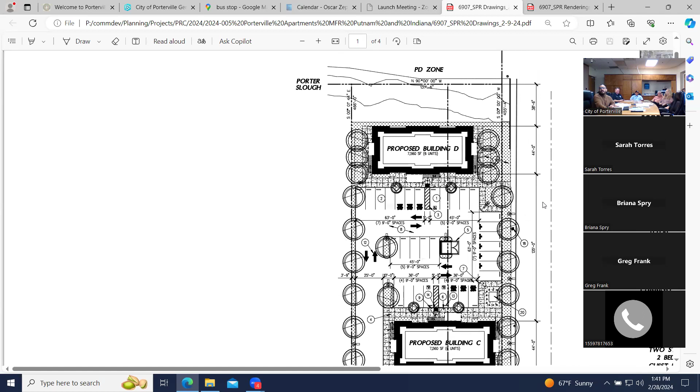And one question we had for the applicant: would these units propose any affordable housing, or would it be just market rate? Currently, we're looking at market rate, but we're open to affordable housing as well.

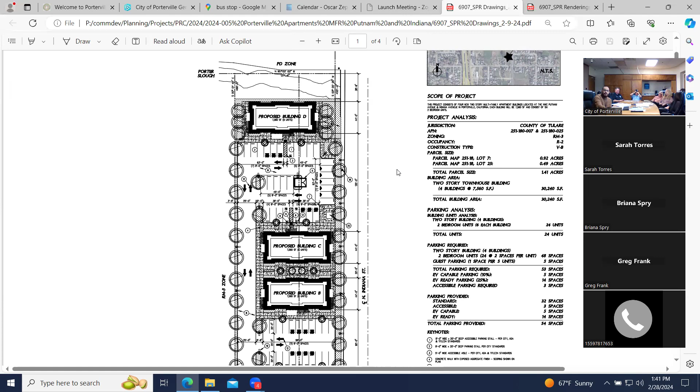There are some incentives and concessions. If you do go that route, you can also get bonus densities as part of your project to exceed the maximum allowable, for example. We will provide that information in the PRC comments, if that is something you would like to take a look at. That'd be great. Thank you.

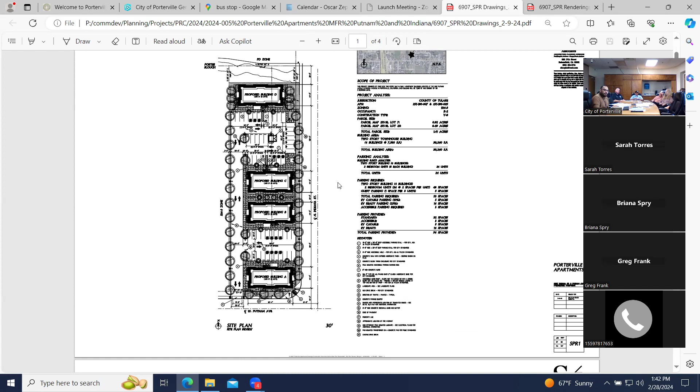But other than that, that's pretty much our comments from planning. Are there any questions at this time for planning, Greg?

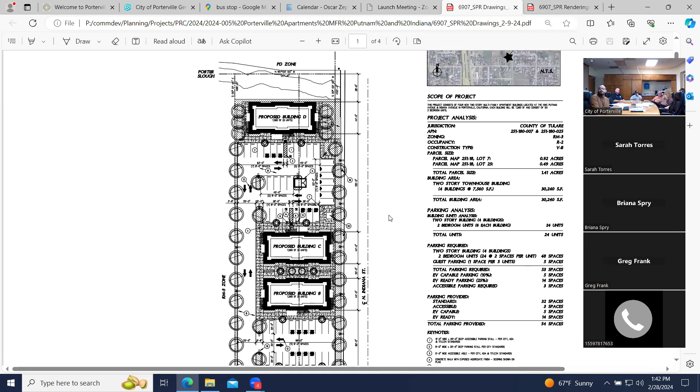No, the only item I was going to bring up was the discrepancy between our application stating 32 units versus the 24. I'm glad that you caught that. Thank you. We've been going back and forth with the developer to increase density and actually had looked at converting one of the 2-bedroom units in each building into 2 studio units, but after doing some more market research, we reverted back to all 2-bedroom units.

Okay, I do want to share the elevations here of the project. Something that I did want to mention also that the project does meet the minimum for architecture articulation, making sure that the units have a roof or recessed entrance.

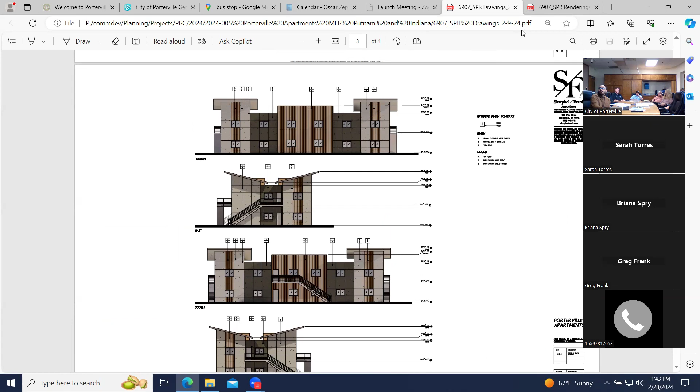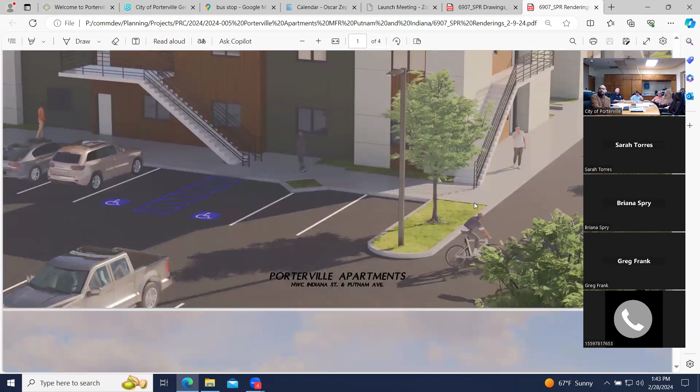Just a comment I also wanted to add. Okay, we'll move it along with fire with Clayton.

For this project, the project shall comply with the latest applicable codes. Fire hydrants shall be placed based on distance, no greater spacing than 300 feet for multifamily residential applications. Where 2 or more hydrants and multiple fire sprinkler service connections are required for a project, the fire hydrants and service lines shall be on a looped system with proper backflow prevention.

Depending on the location of existing hydrants and the required fire flow, additional hydrants may be required. All hydrant locations shall be approved by the fire department. Fire hydrants located across a public street shall not be utilized for calculations or considered as available to meet the fire flow and/or FDC connection requirements for this project.

No structure shall be greater than 400 feet from a fire hydrant. All hydrants must be in place and accepted by the fire department prior to any combustibles being brought onto the site. The project is to meet the minimum fire flow requirements per the table in Appendix B of the most recently adopted edition of the California Fire Code, which is the 2022 Fire Code.

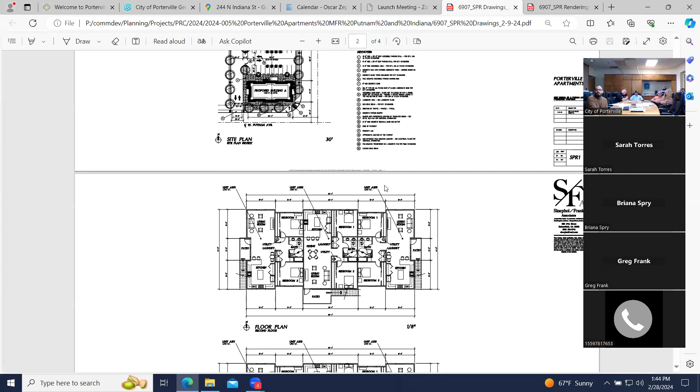Fire sprinkler plans and calculations required. Underground plans shall be submitted with above ground plans. Fire alarm monitoring plans are required. FDCs are required to be placed within 50 feet of a fire hydrant in an approved location. And where conditions permit, the FDC is to be located no closer than 40 feet from the building.

2 entry and exit points are preferred. Based on the size of this project right now, this is not a requirement, but it is preferential if the configuration could be changed to allow for a second point of entry access, primarily on the Indiana side there. And if so, if there is a secondary access, it has to comply with the California Fire Code.

We need to maintain a minimum of 20-foot roadways for the fire department access. Fire extinguishers shall be placed to comply with the currently adopted edition of the California Fire Code, which requires no further than 75-foot travel distance.

Address numbers shall be posted on the buildings and shall be visible from the street. Installed numbers shall contrast their background. And based on what I'm seeing now, it's not showing it. However, if through your discussions and as you move forward, you decide to put gates on this, we will require Knox gate access for any gates that are installed.

And that's it for fire. Do you have any questions? No, those are all great comments. Thank you.

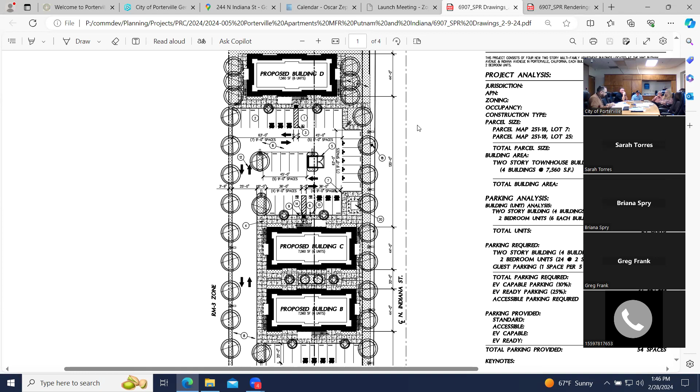Thank you, Clayton. Next with James with building. For the building department, most comments would be during the plan review process. Keep in mind that these will have to be designed per 11A of the CBC for accessibility. And that's all the comments that I would have at this time.

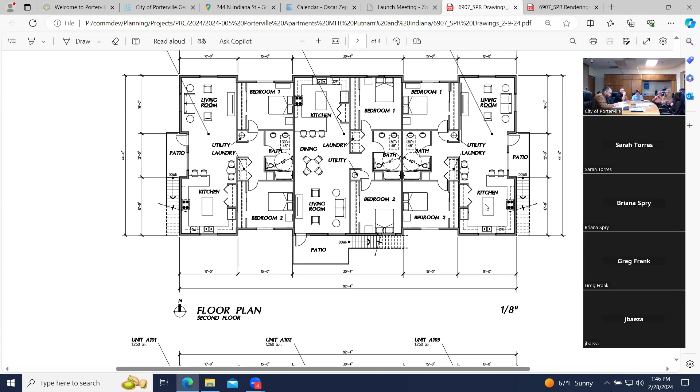Thank you, James. Next with Javier with engineering. All right, thanks, Oscar. For engineering, let's see. Utilities exist there. There's sewer and water around the Indiana and Putnam, so it'd just be tying in to that as you need it.

One main comment will be that because of the scope of the development and our requirements of the general plan, the existing sidewalks that are there would be removed in order to provide a landscape parkway and an offset sidewalk. And so that applies to both frontages. May require improvements to that ramp if it doesn't meet accessibility requirements. And then there'd be an addition of a few more street lights.

As far as a drainage pattern, if you get it to the street, it'll flow west, but there is a minimum required amount of runoff to be held on site per the state's MS4 requirements. So that could be a mix of either a depressed landscaped area, pervious concrete, underground storage, things like that. So those are the main comments from engineering.

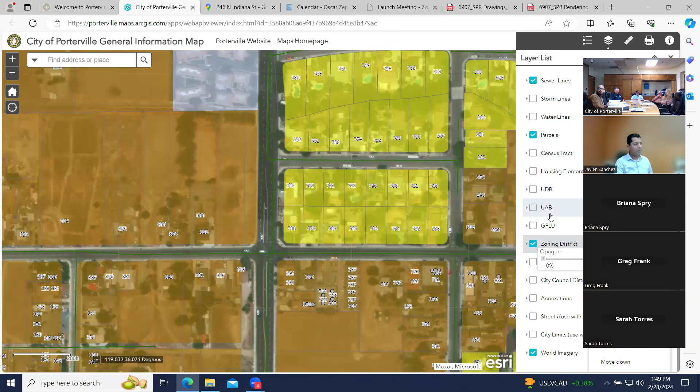It just depends on the designation of the streets. I believe Indiana's an arterial. That one requires 7.5 feet of landscaping behind the curb, and then an 8-foot sidewalk behind it. And then on Putnam, which is a local street, that's a 4.5-foot landscape parkway behind the curb and a 5-foot sidewalk.

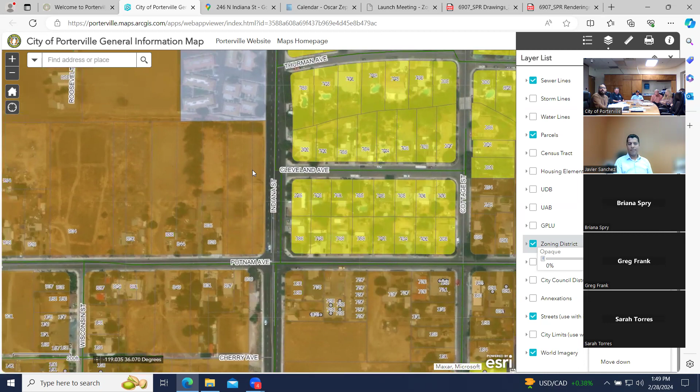Thank you. One quick question, Javier, if they do decide to provide a second access point, since it's not single family, it will be multifamily, would that be something we could allow on an arterial? Yes, yes, and it'd be nice if that could line up with Cleveland Avenue. But if it's offset from that, then we can take a look. Good, thank you.

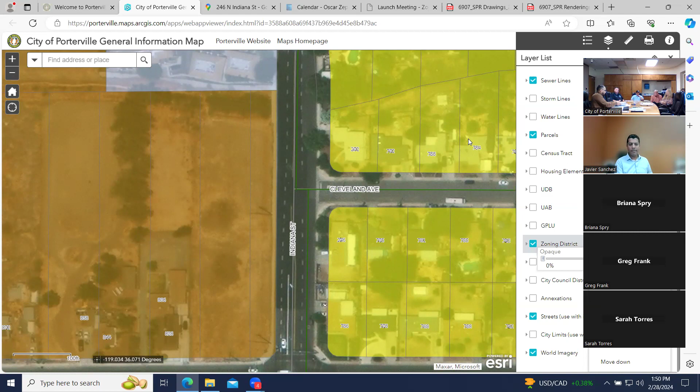Next with Briana. Hi, just to clarify, are you going with the 24 units or the 32 units? The 24 units. Okay.

So this will require 3 triple bin enclosures due to state mandates. Looking at the plans, unless I'm not seeing it correctly, I'm only seeing 1 enclosure there. No, you're correct, we had shown just 1, but we'll make the adjustments to add 3.

Yeah, they'll need 3 bin enclosures, and preferably direct access. Because the way it's set up right now, I'm 99.99% sure that the drivers would not be able to make that loop at the top to service any bins if they were in that area. But having that second access point onto Indiana would be incredibly helpful.

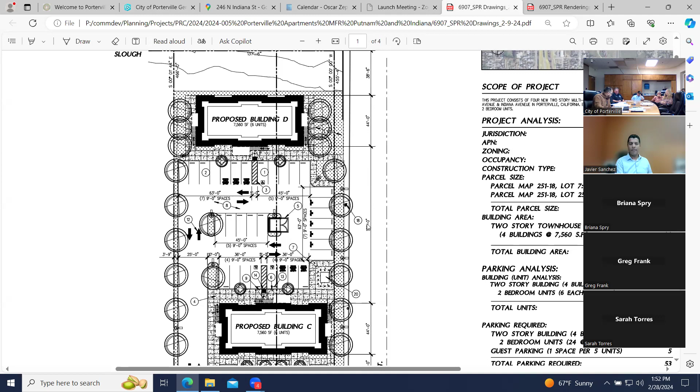Yeah, I agree, I could see the need now for that second access point. Those trucks are so tall and they're just awkward anyway to begin with. And having to back up onto either of those roads is not something I want to allow, so being able to turn around would be pretty important. Understood.

I think that's it for me. Thank you. Next with Robert.

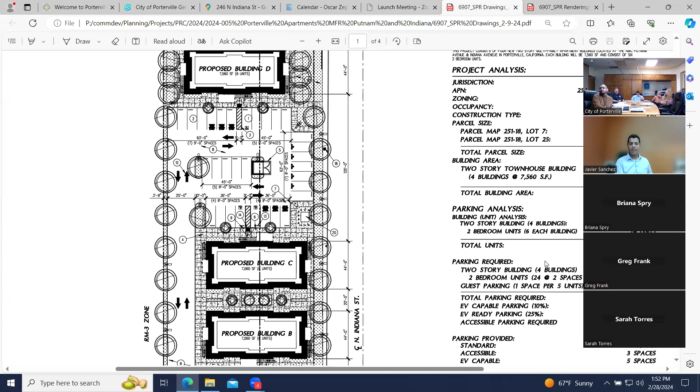So we're gonna need backflow devices on all required water services and fire suppression equipment. You also want to separate the meter and backflow device for all your landscaping. I think those are all the comments I have. Thank you, Robert.

Next with Joe, field services, streets. No comments from the street department. Thank you.

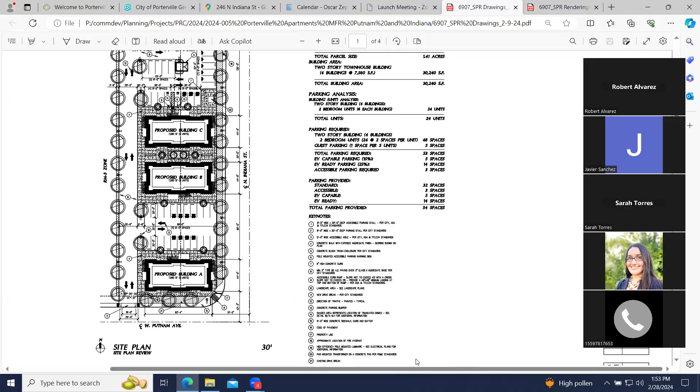All right, looks like that's all of the departments. As far as comments related to today's project, we will compile those in a letter, Greg, and send that out within a 2-week timeframe from today's meeting. If you have any questions in the future, feel free to reach out and we'll be able to assist you on that. And at this time, is there any questions for today's meeting?

I have one quick question. As we redesign this, maybe to add the second drive approach and reorganize parking for the trash enclosures, there's a chance that we may be under the required number of parking spaces. If that is the case, is there any opportunity for a parking reduction?

There is a recent state law that was adopted. For example, if there's any residential projects located within half a mile of public transit, then minimum parking requirements would not be required. So we could work with you in regards to the parking stalls.

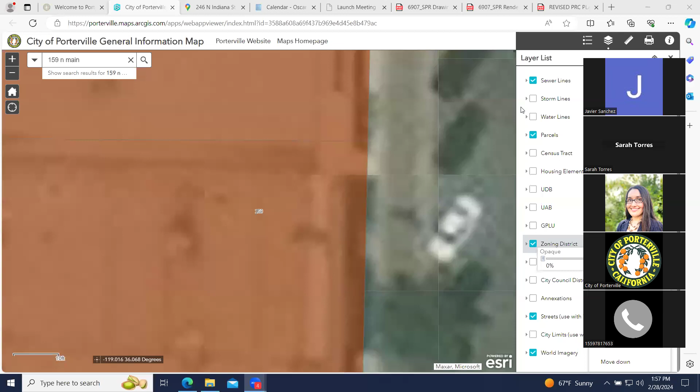As far as zoning, the use is considered retail, which is a permitted use within the downtown retail North of Olive Zone District. The comments that planning would have are going to be limited to signage, any permanent sign you would like to install, making sure it complies with our downtown design guidelines.

Also, the maximum allowable. If you want to display any temporary signs, for example grand opening or a sale of some sort, it will require a temporary sign permit, which runs at $19.75, and we have an application for that, which we'll include links to in the letter. If you're wanting to display any window signs, make sure it does not exceed 50% coverage of those windows, if that's something you'd like to propose.

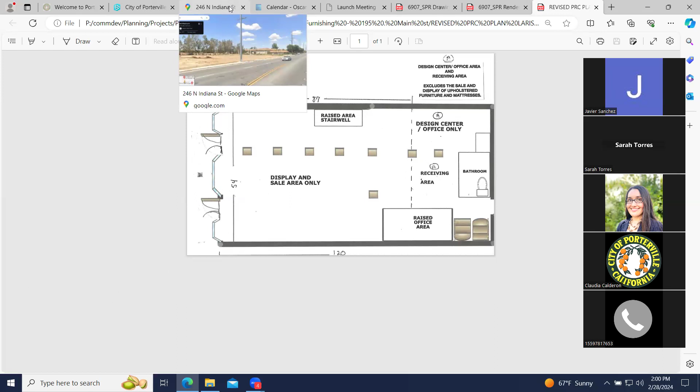The group M occupancy requires fire sprinklers if the area utilized for the display and sale of upholstered furniture or mattresses within the structure exceeds 5,000 square feet. Based on the updated layout provided, it appears the proposal will not require fire sprinklers at this time. Should the sale and display area expand, or there are any additions or modifications, the property will be required to comply with all applicable codes at that time.

Essentially what the fire department will need is Knox access required, and then fire extinguishers placed to comply with the currently adopted edition of the California Fire Code. We met down there and discussed both of those items already, so moving forward that should take care of it. That's it from fire.

Thank you, Clayton. Next with James from our building division. If no construction is being done, no permits are required, no comments from building. Thank you, James. Next with engineering with Javier. Same for engineering, since no construction, we wouldn't have comments.

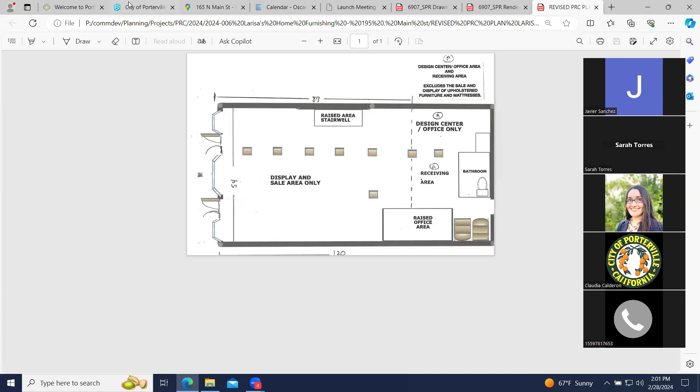With field services with Brianna. I have no comments, thank you. Next with Robert, no comment. Thank you, Robert. Next with Joe. No comments, thank you, Joe. Looks like that is all from staff.

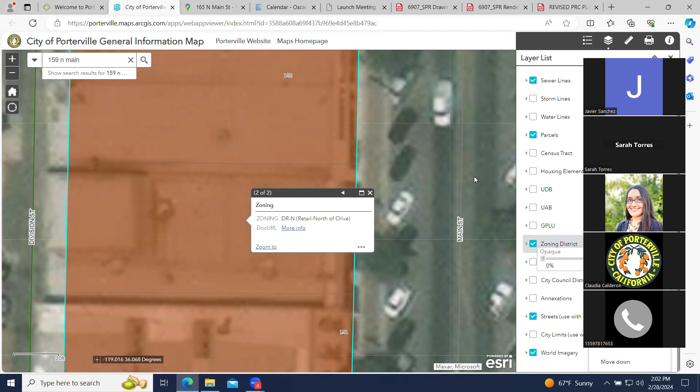Are there any questions from the applicant at this time? My question was related to signs and you answered that, so thank you. As stated on the previous project, we'll compile each department's comments related to today's project, and we'll get that letter out to the applicant in 2 weeks.

One last question: how long before the business license can be approved and the business can open? On the planning side, we'll be able to sign off or approve, if we haven't yet, for zoning. So we'll be able to, as long as it takes to get us all routed.

I would think, expect to see something in 2 to 3 days in regards to the business license. Yeah, it's being routed, it's just a matter of time for all of us to get it routed and get it back. Yeah, this is the only holdup that we know of.